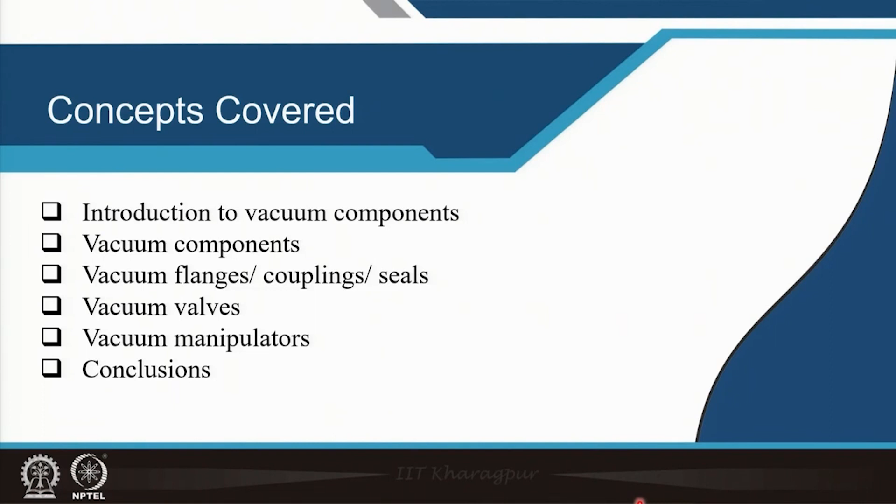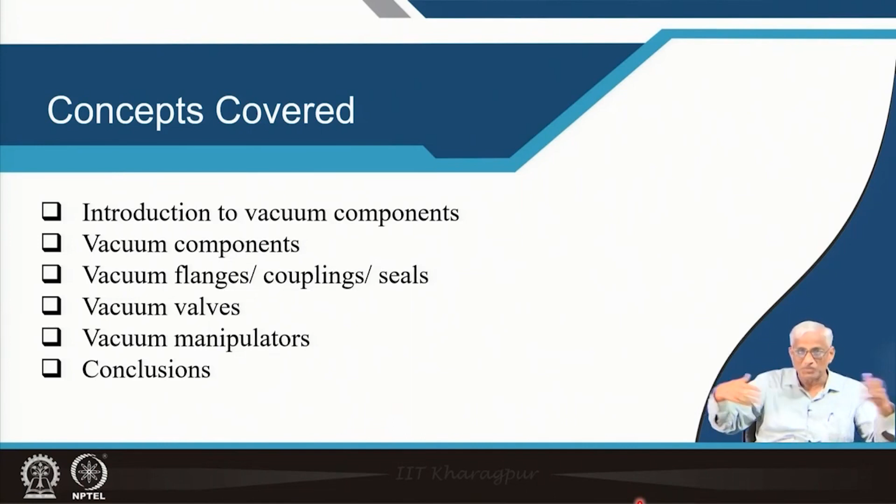In this lecture, you will get coverage of introduction to vacuum components first, and different types of components we will show you. A little discussion on flanges, couplings, seals will be done, and the controlling valves or shut-off valves used in typical process industries we will discuss. Towards the end, very sophisticated manipulators compatible with vacuum also we will introduce, because these are very important in nuclear processes, semiconducting processes and even space technology, for example metallurgy, where you cannot put your hand inside, but you need to manipulate, do some translation, some rotation. So all these things broadly come under vacuum components.

From the figure you can very easily find out how complicated a vacuum system looks like. It contains several pumps, several gauges, several windows, several chambers, several elbows, flexible bellows and interlocking chambers with gate valves, and a variety of electrical feed throughs and manipulators. So many varieties are there. Interconnecting pumping system, process chamber, control systems or many other subsystems which you may have to have in a process industry related to vacuum technology.

If you can make some flexible small components with which you can connect all of them, you have an immediate advantage. Tomorrow you can remove those things and use the same components for some other system. That is the reason in vacuum technology, over a period, they have standardized the type of components, geometry, shape, everything has been standardized, so that you can couple this, and tomorrow if you need a bigger one, that is also available on the shelf. You do not have to make it separately in a workshop.

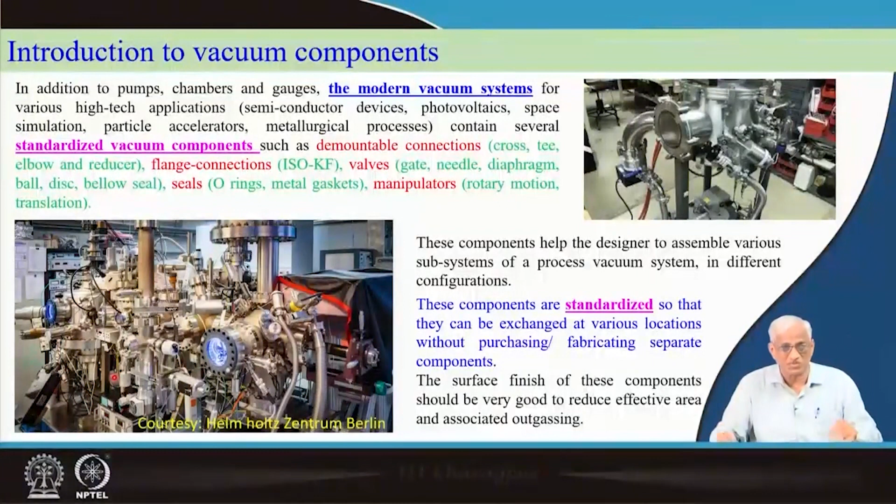That is how vacuum systems nowadays can be easily made if you have some knowledge and idea of what level of vacuum you are talking about, which application you are talking about, then necessary components you can purchase. Of course the chamber you have to make according to the process requirement, and pumps have to be designed. Design means their pumping capacities. You do not make a pump.

The pumping capacities have to be finalized, and depending on the precision with which you are measuring, you will have to decide the gauges. And if you are interested in the chemistry of the residual gas, you have to purchase residual gas analyzers and troubleshoot it in a comfortable manner, then you should also purchase leak detectors. So like that several subsystems, and if you go to very small scale, they are called components.

Last class we have seen materials. With those materials, chambers are made, pumps are made, components are also made. So all the rules that we have laid down for materials are valid for components. Components also should have very high quality surface finish. They should also not degas, and they should be easy to couple and remove, so that it will not contribute unnecessary contamination to the process.

There are standard specifications, ISO, KF, ISO standards are there. Some people call it DN standard, nominal dia. Finally, any component has got a particular diameter through which the flow takes place, whether it is a valve or a pipe or a flange or coupling.

You can see those things here, several components with different shapes, different diameters, and they are coupled with various user friendly components, valves, L's, T's, chambers and gauges, manipulators. Here you will see so many small components. You have to make it ultra high vacuum compatible, then only you will have high tech industries, particularly in IC chip manufacturing, semiconductor industries, or high tech metallurgy, or even space simulation, etc.

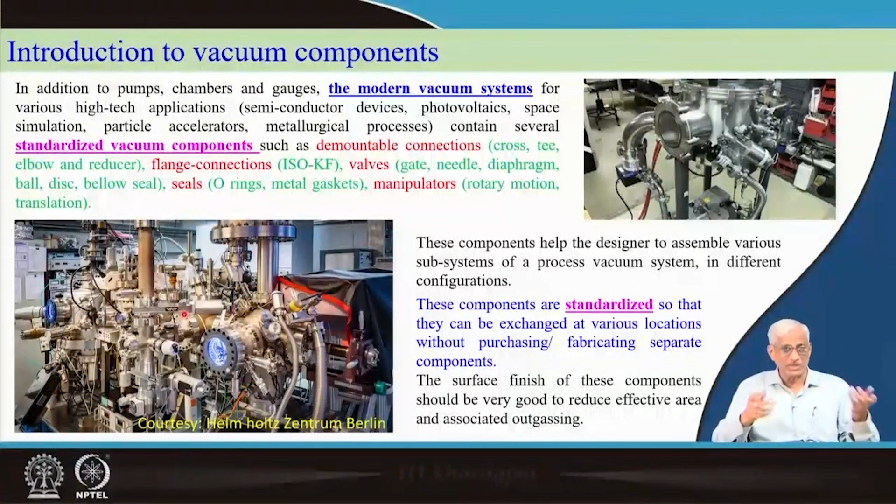These are some of the standard components, small components I am showing, so that you get used to these words. In vacuum technology, these are the words you have to first get used to.

There can be a small cross connection or an elbow in this shape, a small coupling, clamping ring, a small piece which is like a pipe only with flanges attached, so that you can increase a little bit of delta x length in an otherwise long coupling.

There is piping, copper piping or stainless steel piping, whatever is there between chamber and the pump, but these are additional components you have to introduce for isolation, control or additional length. All these are small components you have to handle on the spot. You cannot suddenly realize a vacuum system just from chambers and pumps or pipes or any plumbing work. It is not like household plumbing work.

You have to have maximum conductance, so that minimum pump down time will be there. So you have to use these components, and some are ultra high vacuum compatible, some are high vacuum compatible. When you are dealing with normal vacuum, you should not unnecessarily purchase very costly components. You should also decide your budget, and when you want a very high conductance between the silicon preparation chamber, wafer preparation chamber and main growth chamber.

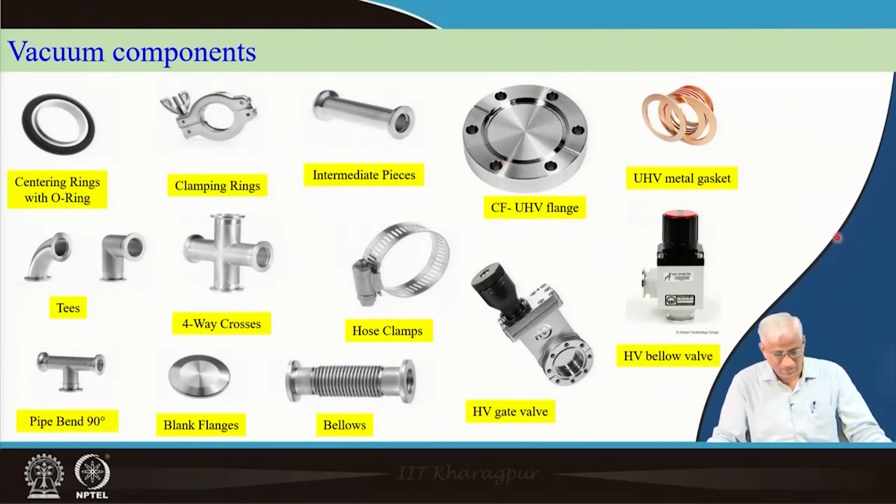You will find ultra high vacuum flanges and couplings are very shiny, because they are polished to such a level that degassing effects are minimum. For 1 torr, 10 torr, you do not have to do it, because it is very costly. If you have to make an ultra high vacuum compatible flange or normal flange, there can be a cost difference sometimes 10 times, though it looks the same in diameter, thickness, material, but the finishing is different at the component level. So these are various standard components we normally come across in the lab.

Friends, after discussing components, I thought of showing some components that we have in our laboratory at IIT Kharagpur. For example, I told you about a cross. These are having 4 flanges, so you can make different connections at various points.

Then you have a T connection. Similarly, you have an L connection. And how do you choose? L means wherever you require an L type of connection, but the dimension has to be DN 40, DN 25, that means 25 millimeter or 40 millimeter, you have to specify. And when you are not using this, you should close it with a plastic cap.

Otherwise, if a small ant or something has gone in and died inside, and some fluids come out, at 10 power minus 5 torr, minus 6 torr, it will produce an enormous amount of gas and you will never get vacuum. So you must be very careful, and you should not sweat on it, because if you touch it with sweat, it will form a monolayer, and at 10 power minus 9 torr it will take 10 days to get to 10 power minus 10 torr, whereas if you are doing it with gloves, it will come to 10 power minus 10 torr maybe in 1 day. So you have to be very careful, and at times, for larger diameter to smaller diameter, a reducer is required.

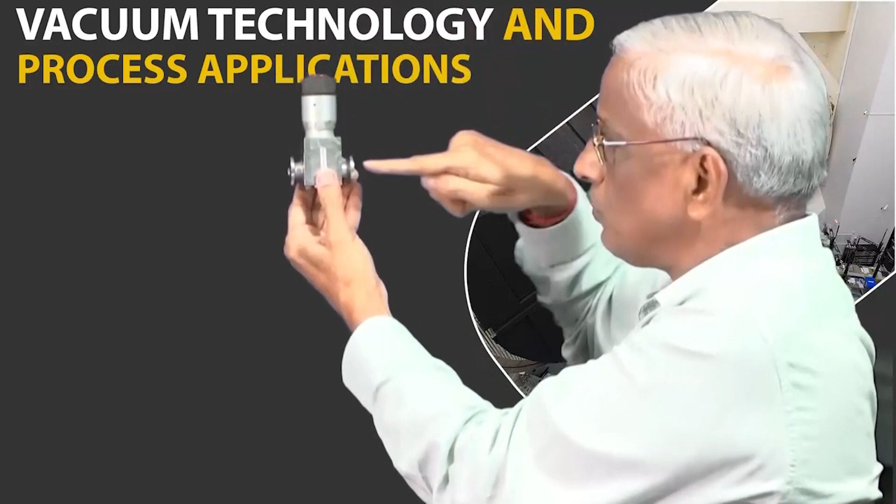And valves are there. For gas inlets, there is a calibrated flow rate needle valve, through which one side is atmosphere, the other side is connected to high vacuum.

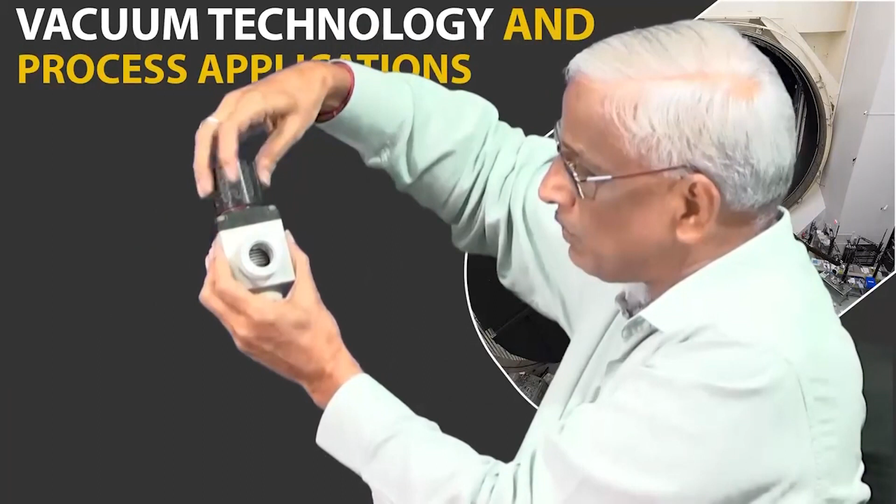And these are right angle valves with bellow inside. When I try to do this in a manual operation, it opens up the bottom seal and it gets engaged. It is a beautiful way of isolating two chambers at minus 5 torr type of things.

But at minus 7, minus 8 when you go, you have to use all metal valves. And typical couplings that we see in day to day life for connecting pipes, the actual plumbing work gets soldered to this. This is my flange coupling type thing, KF coupling.

This is a routine -5 to -6 torr, and this is my center ring and O-ring. The center ring is aluminum, and this is my O-ring. So you can center it. Why I call it center is, when I put it here, it gets centered so that it will not fall, because this extra protrusion will go into the slot and the O-ring portion touches this, and the next section the other mating flange will come here.

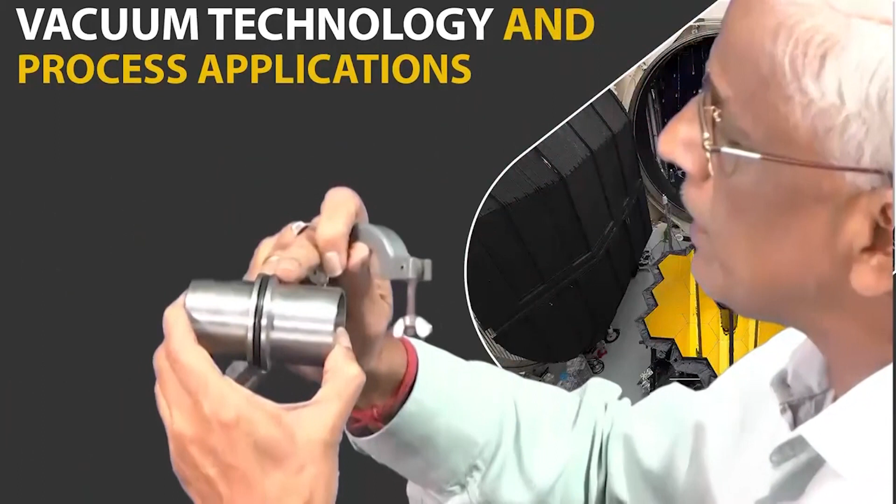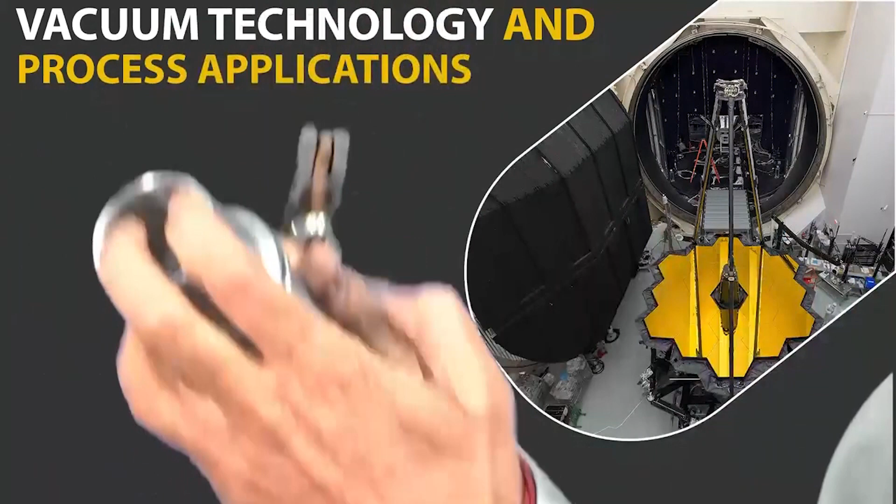Then you put a coupling, and these are 15 degrees, so that when you apply force here, a part of the component goes here with a smooth pressurizing like this, so that the small roughness that may be there in micron level gets compensated by this O-ring.

These are called O-rings because it looks like an O, and these are neoprene in normal vacuum, Viton for high vacuum. But none of these things are good for ultra high vacuum.

In ultra high vacuum, you require a flange like this, conflat flange, wherein I will put a copper gasket and another conflat flange like this. You see how shining it is, because these are all ultra high vacuum, and you have to put that, within that a copper gasket is there.

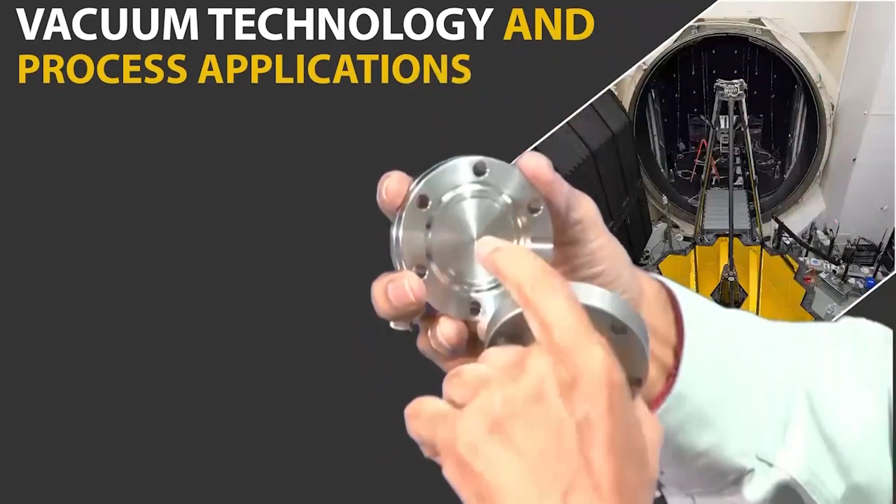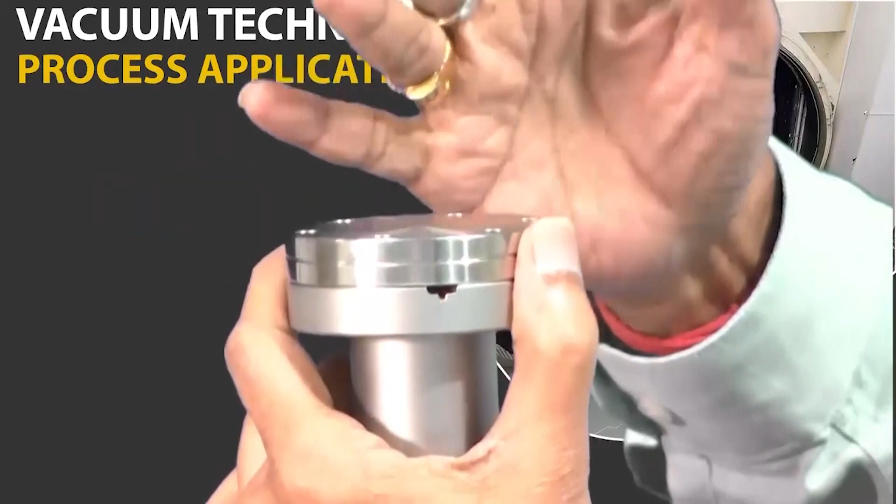So this cone will apply huge pressure on that copper gasket, so that yield stress will cross and it will form a seal. There is no polymer here. So you try to tighten it with a good torque, so that it forms an all metal seal for ultra high vacuum.

And nowadays in process control, you can control it electropneumatically. So the same valve you can connect it to an electrical power supply. Whenever you want, then an indicator will come out, so that it is open, and there is a pneumatic connection given here. So that will be able to lift it, that elbow, the whatever bellow that is there, instead of manually doing like this, you will be doing the automatic things.

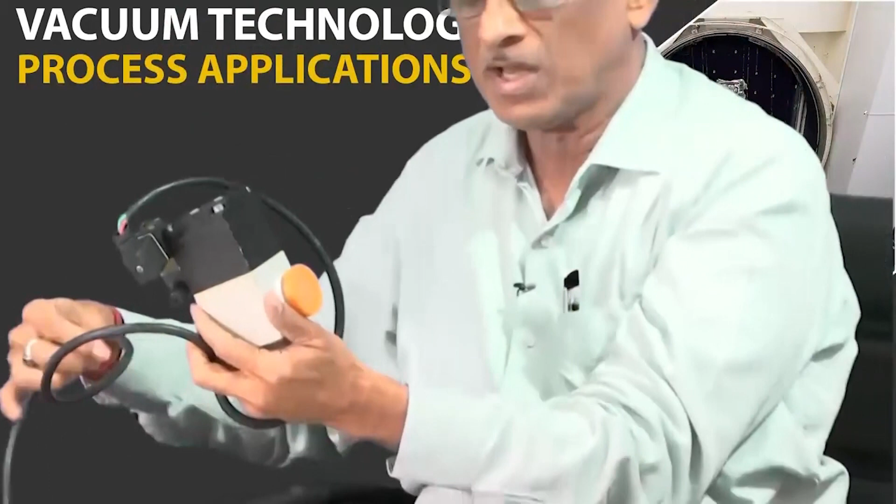Similarly, gate valves, varieties of automation are coming nowadays. So different flanges, different couplings, different valves, different blind flanges, for example, high vacuum or normal vacuum, you have to select properly and decide your components, so that degassing is minimum, convenience is maximum, and your comfort is very good, and it will not be leaky. It should not produce leaks.

Okay, now little bit zooming into that, let us see standard couplings that we have to employ in connecting the piping network, so that the entire system can be realized with your ideas.

For example, when you are making a thin film deposition, you require substrates, you require substrate manipulation, you require shutters, you require source materials, you require electrical feed throughs, you require a bell jar, you require optical window, you require a backing line, a roughing line, you require backing valves, roughing valves, air admittance valves, interconnecting flexible bellows, valves, seals, so gauges. You have to be careful in choosing all of them.

Okay, now let us see a typical coupling. The top one is KF coupling. KF is Klein flange in German. Klein means small flange couplings, and they are quick couplings.

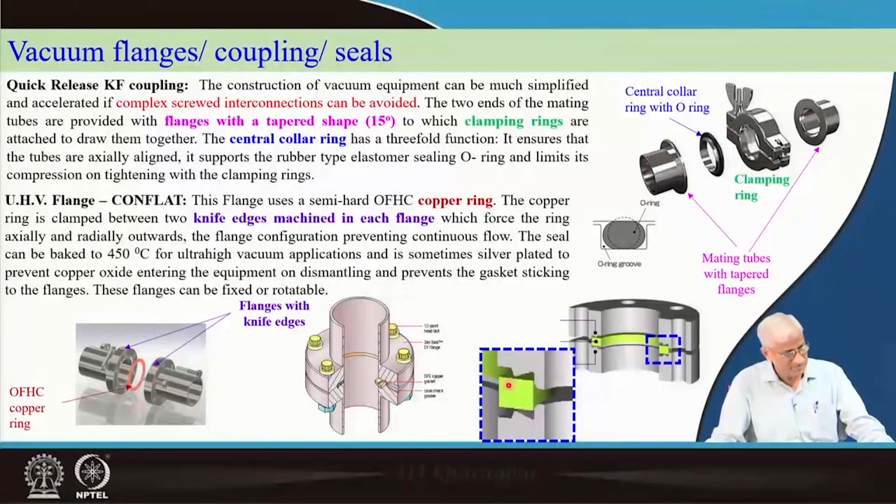Similarly, you have control valves, which can be called control valves or isolation valves. For example, in a diffusion pump system, there is a backing line, a roughing line, and a main isolation valve. Why? Because first we need to evacuate using a rotary pump from atmosphere to 10 power minus 2 torr, then close that valve. Then the same rotary pump is connected in the backing line through another valve, which was originally closed during the roughing stage, supplying enough backing action to the diffusion pump. When the diffusion pump and rotary pump together have created good vacuum, then you open the main isolation valve.

This assumes that by that time the top vacuum system is not leaky, so whatever vacuum created at 10 power minus 2 torr by the roughing line is retained. Now when you open it, 10 power minus 6 torr is instantly connected, and to make good conductance you use a gate valve or cold trap, components we have seen already. Done intelligently, you can get fast pump down. If you make a mistake, the system can become leaky, or you can introduce very poor conductance and fail to get vacuum. So components should be chosen carefully, but valves are required to isolate at various timings.

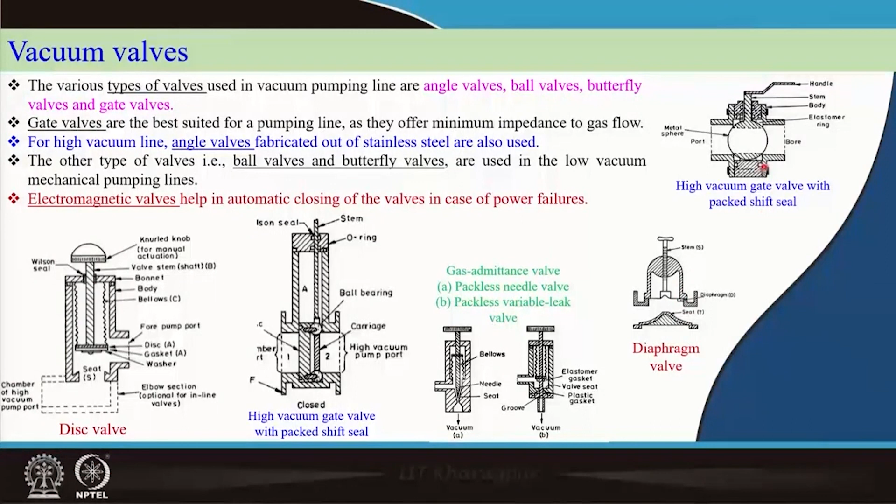This is a diaphragm valve, good old valve, since long people are using, nowadays they are not using. Ball valves are there, which also give very good throughput. These are all routine things which we have seen in high pressure piping also.

Here the seals and coupling should be compatible, there should not be leak from the atmosphere to the inside. If you can take care of that, a mechanical engineer will be able to easily design these valves with good conductance and good controllability.

One time it works, second time it gets stuck, then you are in trouble, particularly gate valves. Sometimes it gets stuck while everything is going on, and a semiconducting wafer has to be transferred, and suddenly the gate valve gets stuck. Nowadays all these valves are engaged with electropneumatic control, so that from a remote place you can control and open, close, etc.

Very soon artificial intelligence, IoT controllers, fuzzy logics will come. So varieties of things are now coming, electrical, electronics, programming, mechanical and instrumentation, all the fields are joining along with metallurgy, chemistry, physics. Then only you can make beautiful devices for nuclear fusion and semiconducting devices, high speed memory elements and high speed integrated circuits, and very high quality metallurgical alloys for very specialized purposes like artificial limbs, etc. The purities are very important.

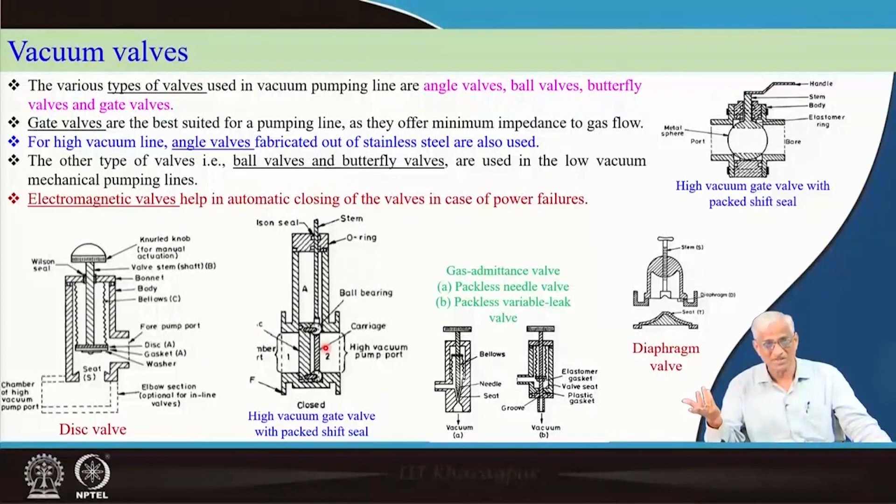Now, at the end, in a vacuum system, we need to do something inside, but the action is outside, the reaction is inside. Such situations will come, particularly in nuclear processes, etc. You cannot approach the place where the actual processes are going on, even thin film growth or many other plasma processes, you cannot go inside.

Even the manipulators have to be designed in such a way that very precisely it will open the shutter, such that the flux is controlled, or we are controlling something electromagnetically. So some other motion is going on inside, whether it is translation or rotary motion, and that process is controlled properly.

You will get the type of thin film that you want, with this many moles of one gas, and another moles of another component, multi-layer depositions. When you want to do such complicated processes for making sensors, IC chips, various circuits, mirror coatings, or engineering coatings, you have to be extremely careful.

So a lot of manipulation is required. Sometimes it can be automated manipulation. These are some of the standard manipulators people are using, these are all vacuum manipulators, and they are available commercially now, and of very high quality.

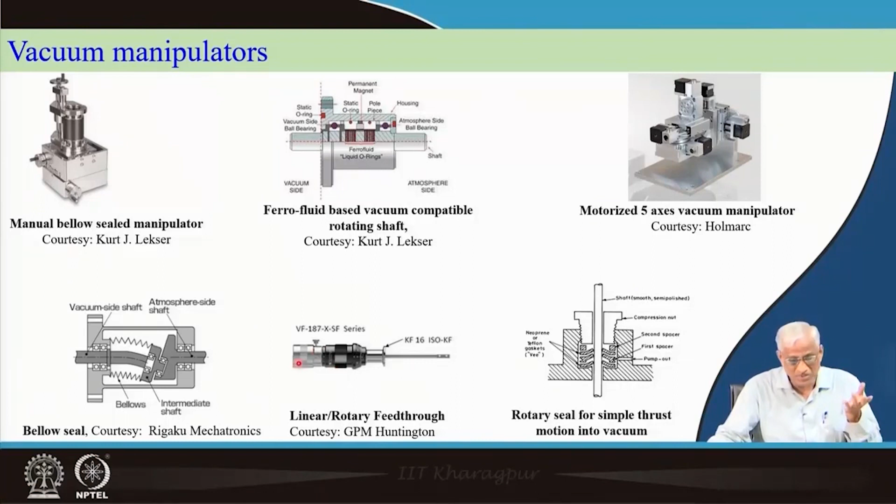But I would suggest some startups come up, you can easily make these things. You are not making high quality chambers or high quality pumps, but you can make your own inexpensive, innovative manipulators, and you will have a very good market for it.

I want new youngsters to come up with more and more ideas, because today lots of controllers are available, electromagnetic controllers, SCADA controllers, and remote IoT is available. Things are changing, you can add any dimension to anything in vacuum technology, and vacuum is after all a clean process. So this component level research is very important.

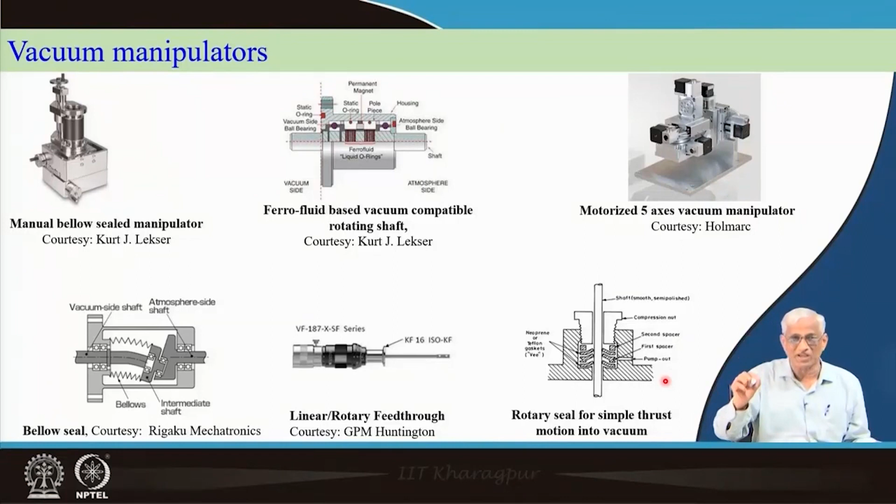You may be thinking, instead of concentrating on components, why am I giving you this, because these components you will get in every manual of so many companies. But I am only trying to highlight the importance of components while interconnecting subsystems to make an overall system, to satisfy your main aim of getting fast vacuum, clean vacuum, and controllable process.

So, to conclude this section of vacuum components: standardized vacuum components are now being made all over the world with very good surface finish, so that they are vacuum compatible. What are these components? They can be valves, flanges, seals, interconnecting piping, or any small things required within the vacuum system, which is an independent item.

It cannot be welded to the main chamber. These are called vacuum components. They are coming up in a big way, and this is the area where a lot of startups can come. Then they can be repeatedly used, you can take them out, use them tomorrow, and they can be exchanged with somebody else. You can give them to your neighbor in his industry when you are not using them much.

And they should be compatible to the level of vacuum. Low degassing is very important for ultra high vacuum. Gate valves are very expensive, you have to use them when high conductance is required. Needle valves with high precision and repeatability should be there. Backlash should not be there for perfect mass flow controllers of gases to realize plasma processes.

And precision manipulators, XYZ and tilting and rotation, are required, like molecular beam epitaxy or various other engineering coating industries, space simulation chambers, nuclear processes, or semiconductor manufacturing. You require a lot of manipulations.